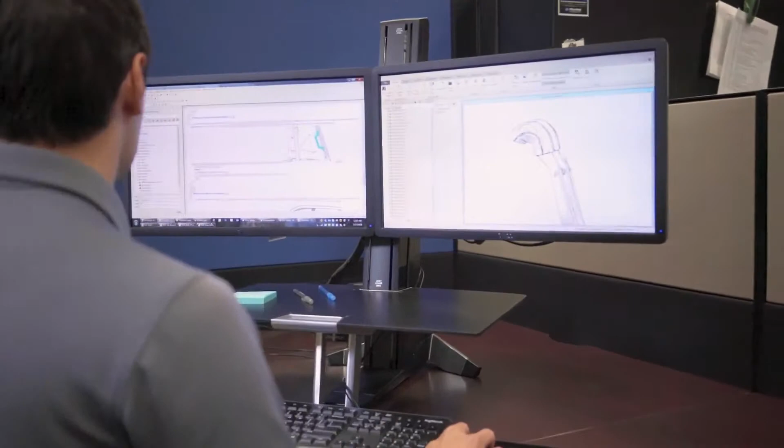The core of our direction is to provide a really amazing riding experience. And as we started to incorporate more technology and more digital input into the rider experience, we wanted to keep it very transparent and we wanted it to not be intrusive. So the big challenge for us is to incorporate that, make it easy to use, make it invisible so that it's not predominantly a technology thing, but it's still a vehicle thing.

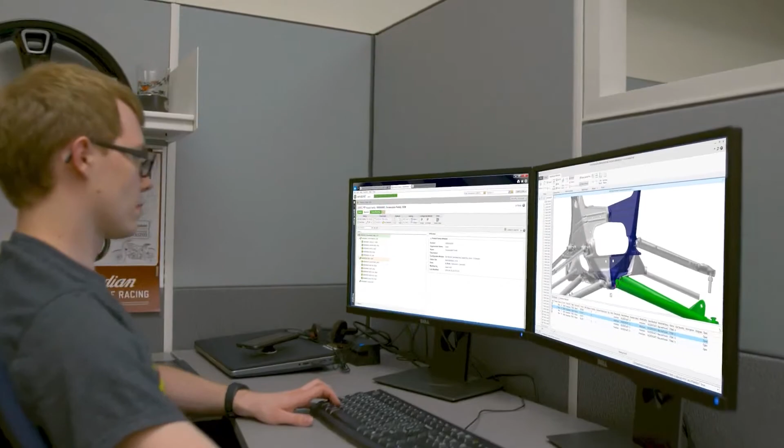PTC, Creo, Windchill in the company is, I would say, our standard of communication, particularly in vehicle development, is how we're all stuck together and how we talk to each other. It gives us a way of incorporating data that comes from the outside, that comes from our users.

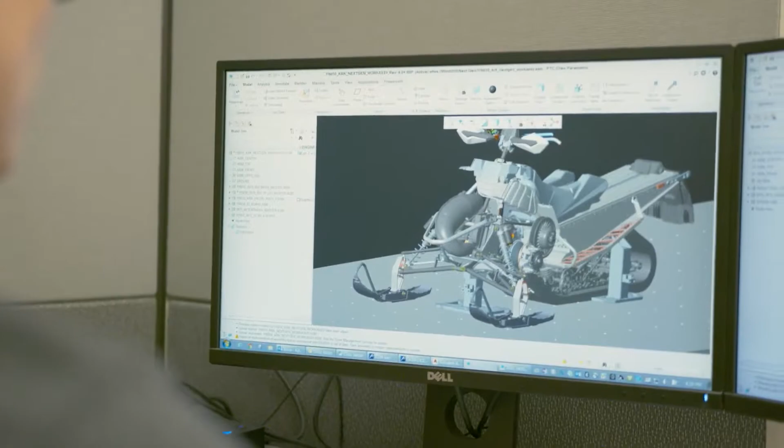We're using connected data across the different life cycles of our product introductions. We're using connected data from our factories, helping us make sure that we understand exactly how our vehicles were built. We're using data from our dealers and from our field to understand how our riders are using our vehicles. Ultimately, that helps us make sure that we can design new features, we can design new products, and help those consumers have the best experiences.

Technology innovations, data sciences, analytics, ultimately, they help us not only deliver the product to the consumer, but they also help the ownership cycle for that consumer.

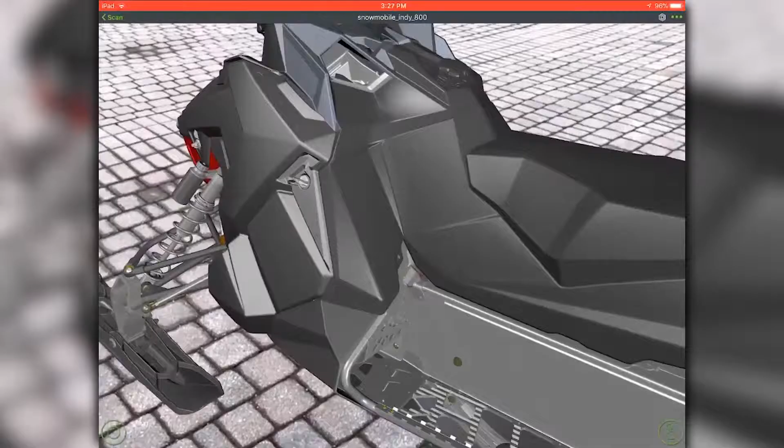The biggest tool that I see right now that Polaris is using to innovate today is the use of the digital twin. That's really helping us speed up our designs and get product in the showroom faster, as well as helping out with the quality of the vehicle.

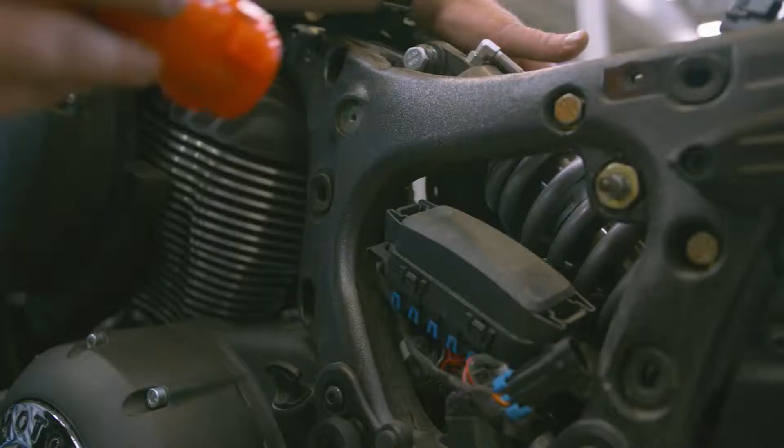As soon as the customer walks in the showroom, we want our vehicle to be the one that pops out and they say, I want to buy that vehicle, I want that one, and that's what the digital process helps us do. The digital twin allows us to share data across the company and create physical models that we can use to then show to potential customers and to upper management to get approval for our designs before we actually implement, making sure we get everything right before we spend the big money to get it into production.

You need to have systems in place in the company to be able to take that information in and distribute it to the right parts of the organization to make the changes or use it effectively.

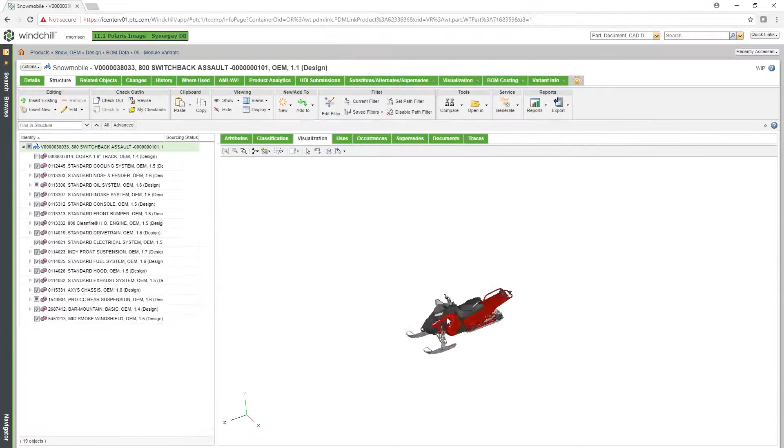We look at vehicle performance, we look at vehicle attributes, we look at how often they interact with different parts of the vehicle. It affects maintenance cycles, or it can also tell something's about to go wrong, you should probably bring it in. Those things I think are going to really enhance the vehicle experience for people in the future, and that's the way we're going.

Our customers are able to go to their configurator not only to design the vehicle that they want, but to also immerse themselves in that vehicle, zoom in, view the cockpit, understand what it's like not only to see the vehicle, but to be inside of the vehicle.

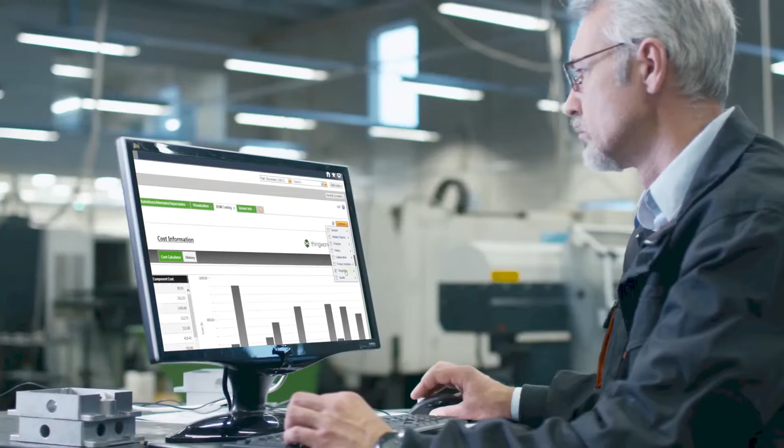We're using analytics, we're using data across the spectrum of our vehicles, across the spectrum of our product life cycles, to be able to produce high quality vehicles, to have insights that feed back into our design and our validation processes and meet the customer's expectations.